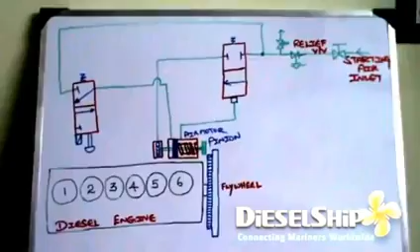This is a simple air starting circuit for a 4-stroke engine, or a small engine which has an air motor for starting. Let's now understand the basic simple circuit.

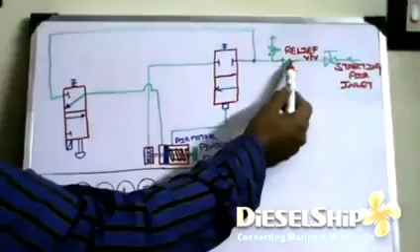Here we have the starting air inlet, usually 30 bar from the air bottle, and depending on the size of the engine we have a pressure reducing valve. This is optional, so this valve depends on the engine size, it may be there, may not be there.

For bigger engines, if you want to start with air motor, 30 bar is required. If it's a small engine, 30 bar is not required, so this pressure regulating valve may be adjusted for 20 bar, reducing the pressure and then giving it to the starting circuit.

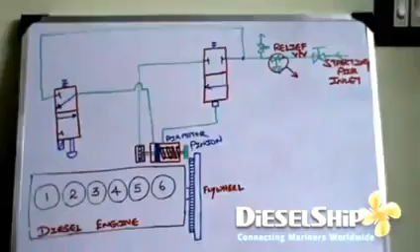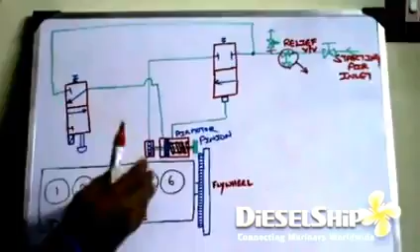After that we have a safety mechanism, a relief valve, which means if something happens in this air starting circuit, the relief valve will lift and the air will be vented out to a safe area. All this location and purpose depends on the ship design and the starting requirement of the engine, but the basic system resembles this one.

So this is the simple diesel engine. Let's say it might have 5 or 6 units. I assume it to be a 6-unit engine with a flywheel, and as we all know, the flywheel has gear teeth over here. The bigger engines normally used on board ocean going vessels have teeth like this which engage with the turning gear and thus turn the flywheel.

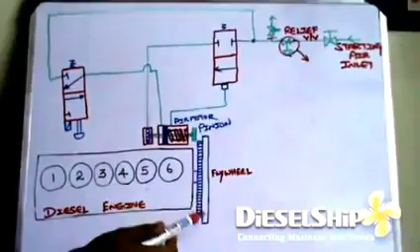A similar arrangement is there so that the air starting motor, this is the one, has a pinion which is a gear tooth that engages and turns the engine. As it turns, the RPM, the speed of the engine, raises enough so that combustion can take place. Till then, the air motor will rotate the flywheel with the help of compressed air.

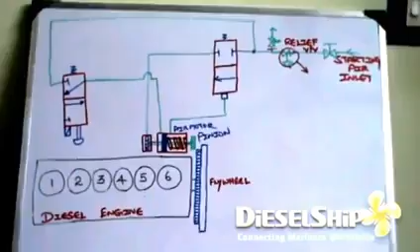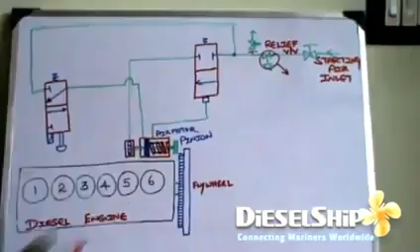So let's now understand the circuit. The 30 bar air, or the required air pressure after the reducing valve, comes over here and stops and waits at this control valve. This is a pneumatic operated, spring loaded, 2-position and 2-way control valve, and a part of the air branches out and goes to a control valve which has a 2-way starting mechanism.

Either it can be a push button over here which is useful for manual start, or a remote signal can be given from the control room, thus this valve will operate.

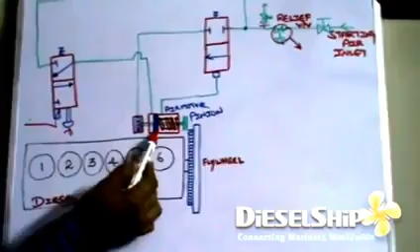After the valve, the main line goes to the air motor which has a piston here. The piston is spring loaded, and as the air pushes the piston down, the pinion moves down and engages with the flywheel. And as the piston goes here, the air passes through.

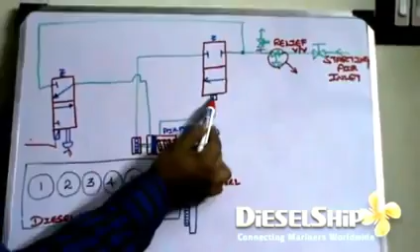This port is uncovered. This port has access to here, and the air passes like this and activates this pneumatic valve, the control valve. So this comes into this place, allowing the air through, and then here are the vanes.

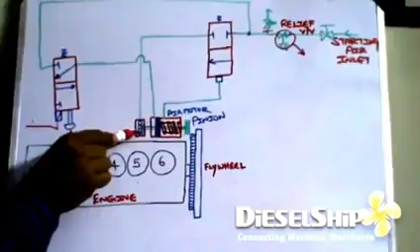This is similar to a vane or a turbine which has various flaps, and as the air comes and hits it, it starts to turn. Thus the pinion is engaged with the help of the piston, and with the help of the vanes and air pressure, the engine is turned.

And as the engine picks up speed and starts combustion, let's say at 30 or 40 RPM depending on the engine design, it fires on fuel now. A signal from the governor or from the control system, depending on the design, comes and deactivates the solenoid valve.

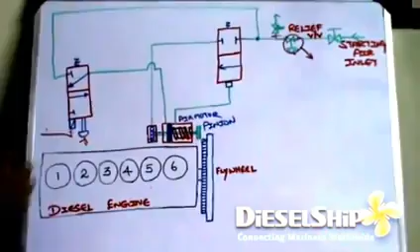Once it gets deactivated, the valve gets shifted again, the air behind the piston gets drained. So the piston, due to the spring force, retracts, withdrawing the pinion from the flywheel, and the air access is shut off, meaning the air to the vane or air motor is cut off at this place.

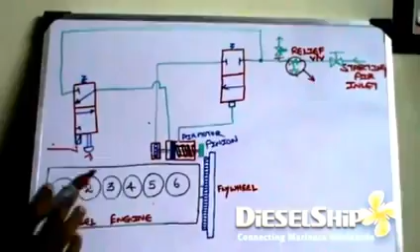Now this is the engine in, let's say, idle position. The engine is not started now. The other diagram which I'm going to show will be a working diagram, a working circuit. Let's see how it is.

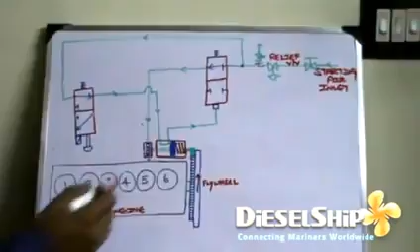So this circuit over here represents the air motor when it's working. As I said earlier, the 30 bar air comes over here, and I start the engine manually by pressing this lever, and the 30 bar air which is waiting over here, as the valve gets shifted, passes through the control valve and then passes through.

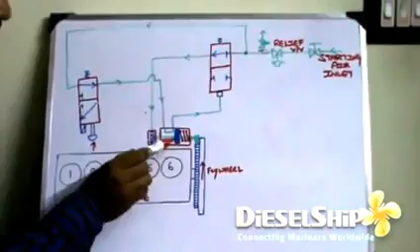Thus immediately it pushes the piston down, engaging the pinion with the flywheel, and as it pushes, it passes out and operates this control valve pneumatically. So the compressed air operates this control valve.

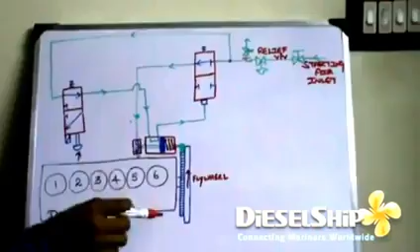Thus the main air which is waiting here, the valve shifts and passes through, rotating the vane and getting vented through a small hole. As it rotates, the pinion rotates, turning the flywheel, and the engine picks up speed, reaching firing speed, as I see on the tachometer on the engine panel.

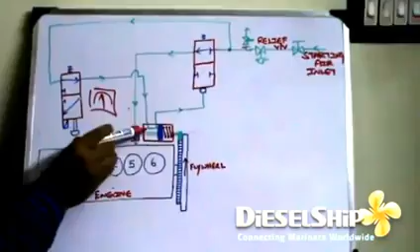As it picks up speed, I release the lever. Once I release it, immediately due to the spring force, the valve shifts and the line gets vented. The air behind the piston gets vented, which means the piston, due to the spring force, comes back to its original position.

Thus the pinion is disengaged, and this control valve, since there is no air supply, shifts back, stopping the air, and no more air supply for the vanes. So the air motor stops working at this time. Thus the engine is started and then picks up on fuel.

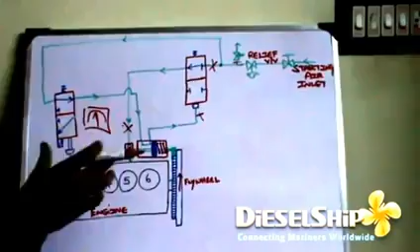This is the basic circuit, and in future videos we'll be seeing about the air motor and its construction, and other mechanisms or means of starting, such as hydraulic starting of emergency generators, etc.